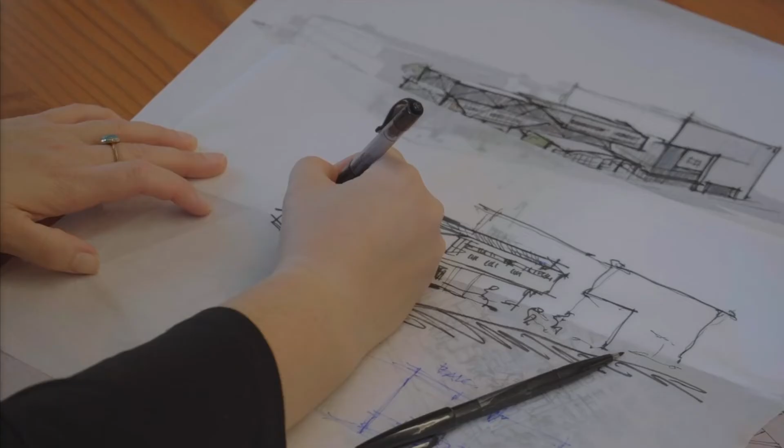I remember in my interview the pride in Barbara Flammang's voice when she told me the firm was more than 50% women. And it's not an intention, but it's just looking at the person and the talent. We don't feel like we're the exception in the architecture industry. We feel like we belong at the table just as anybody else would. I walked around and I saw women in leadership roles. I felt like I knew this was where I wanted to be. There are so many women in the positions of leadership, from partner to senior associates to project directors, and that really shows staff of all levels that you can be anything that you want to be at KFA or in this industry.

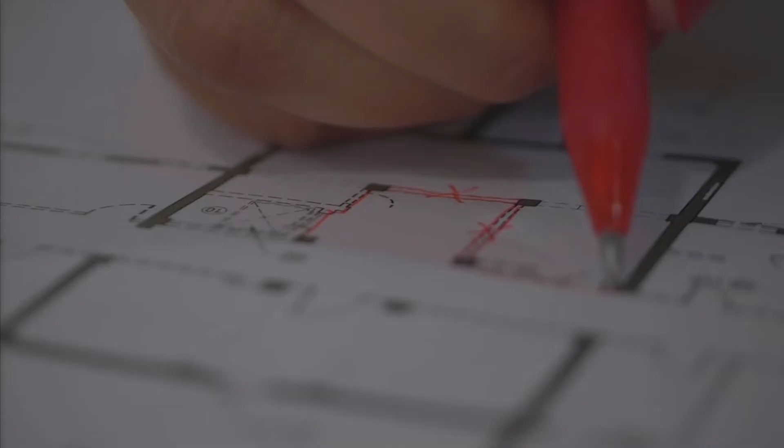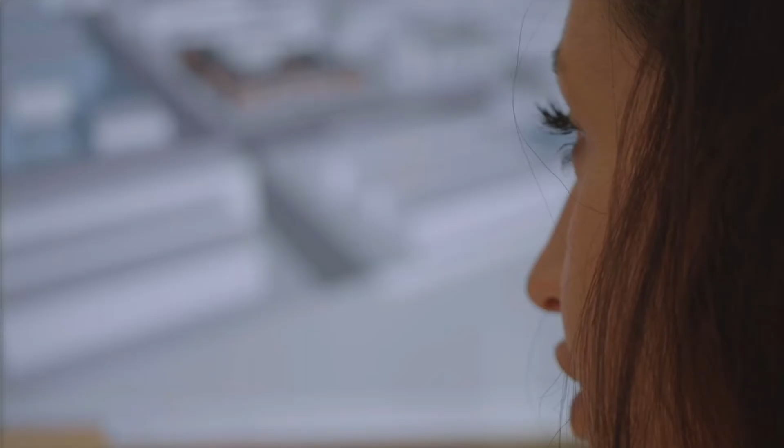I think we need to support each other and be a mentor to other people, to other women in the profession, and share your story. You can reach out to any woman in leadership any day, every day, and ask all the hard questions, the easy questions. That's powerful. My daughter, who's almost 4, says my job is to build castles. And then a personal big one for me is their support of motherhood, just ensuring that I have a strong work and home life balance. We all stand on the shoulders of those who have come before us. And it is important for us to recognize the opportunities that we've been given by other women in architecture.

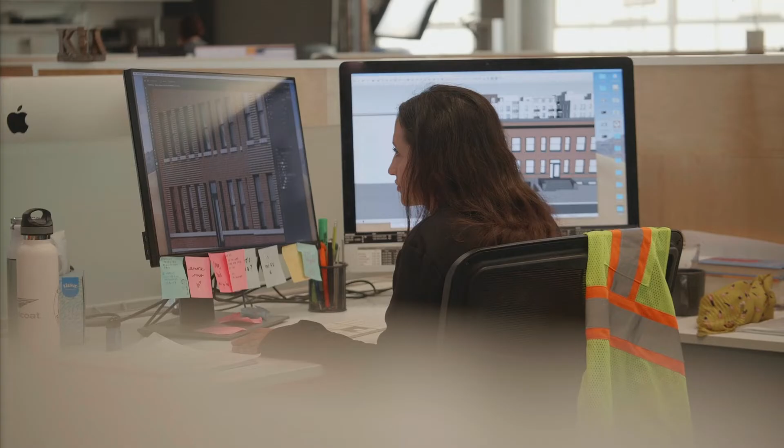It's their legacy for us to be able to bring that forward. Conferences like Powerful show us our community. We see how far we have come and how much farther we can go together. Powerful is an opportunity to stretch for my sisters. Powerful is having confidence not only in my profession, but in myself. Powerful is an emphasis on collaboration. What opportunities are there at KFA for women? The sky is the limit. We are united voices, part of lifting that community up and forward, and being amongst this amazing community. That's powerful.

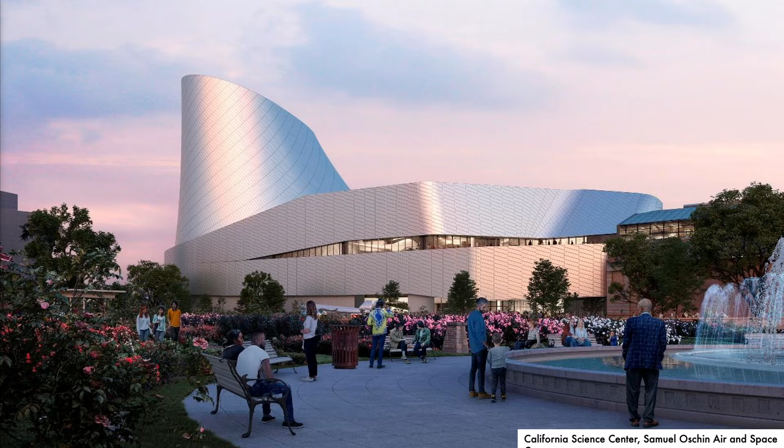This is a women's and children's hospital we're building in San Antonio. One thing that really resonates for me is that this was a community hospital that wanted to become the hospital of choice for everyone. We really took care to find the different ways women want to have birthing experiences and provide that for them. What's unique about all of these projects is that they are all women-led, and I'm very proud that we have great leadership at ZGF in our women.

So I'm going to now change my hat to the president. I wanted to start off by saying...

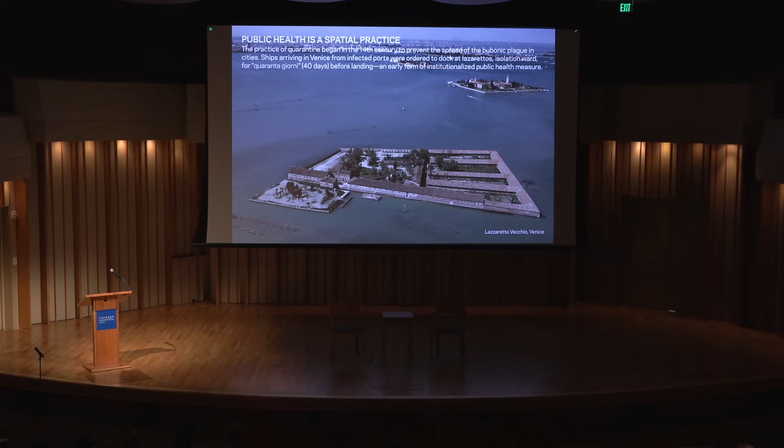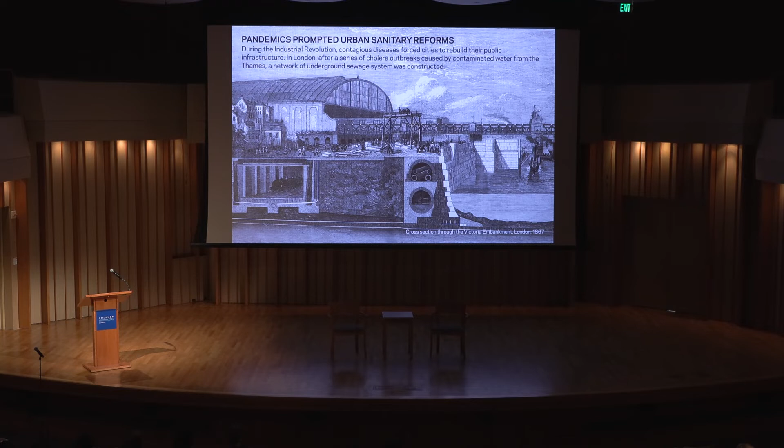And we think about the pandemics prompted urban sanitary reforms. Again, the Industrial Revolution and contagious diseases forced us to rebuild infrastructures. In the case of London, the cholera outbreak led to this whole idea of an underground sewage system. So the spatializing of health and connectivity is one thing.

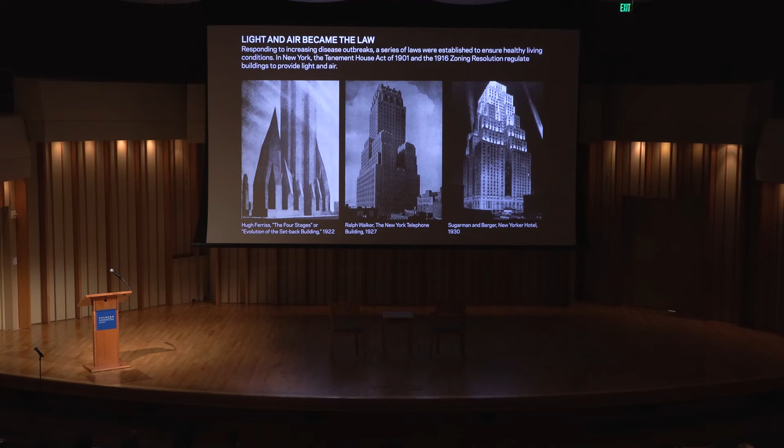But then we think about light and air becoming the law. In New York City, the rezoning at the turn of the century, over 100 years ago, made sure that light, air, and density could be coalesced around the growth of a city. And then the whole idea that we all need room to breathe. As diseases were shaping modern architecture, Aalto's Paimio Sanatorium was a very good example of privileging the whole idea of outdoor space, even if it was in fact elevated.

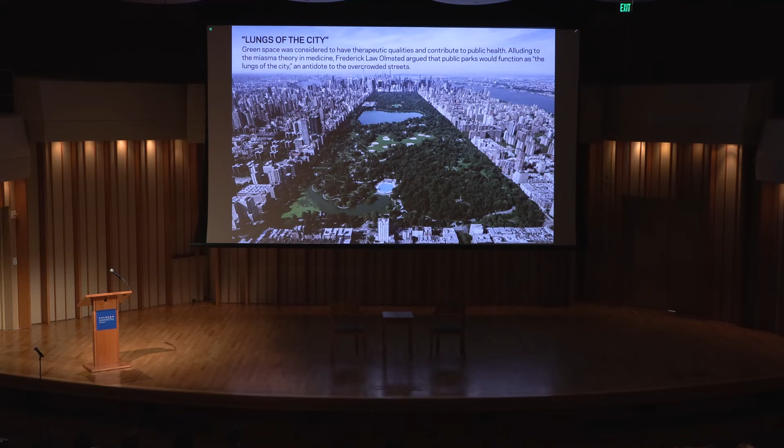This whole idea of masterpieces, and Laurie Olin's piece that was just in the Wall Street Journal yesterday really spoke about the art form that Central Park truly is. It was identified as a place of public health, the lungs of the city. As we think about that lungs of the city idea, this question of breathing room takes stake not only in the immediate sense of an individual needing breathing room, but a whole city and community benefiting from structured breathing room.

What becomes interesting here is this whole idea of anomalies in all of this, and it's the anomalies that seem to somehow catalyze advocates. I'm going to share 6 or 7 projects today in terms of this question about anomalies, advocates, and allies. In this case, the absence of a site for recognition catalyzed innovation for the Women's Memorial Education Center, which was our first project. Michael and I won it as a competition.

The interesting question was, in a forgotten site, there was a forgotten subject of over 2 million women who served as patriots in the country, but had no recognition, not to mention no benefits compared to the men who had served. We had a client, General Vaught, who found this site that was a gateway to Arlington Cemetery that had been designed just as a retaining wall. It had no meaning. She said, can we acknowledge and celebrate the women who'd served since the Revolutionary War and create a place for them?

We promised to fix this wall up. It's kind of a mess. If you ever met General Vaught, you'd realize if anybody came up to you and said something's a mess and needs to be rectified, she was the one that would make it happen.

Congress, within 4 months, actually gave her this site to host as a place for competition. We used it as a site to say, when we won the competition, that wall had been a barrier, simply a retaining wall. Women had faced barriers, and we could actually come through the barriers, enabling her advocacy for the women who had no voice and no legibility, creating a place, a commemorative gallery.

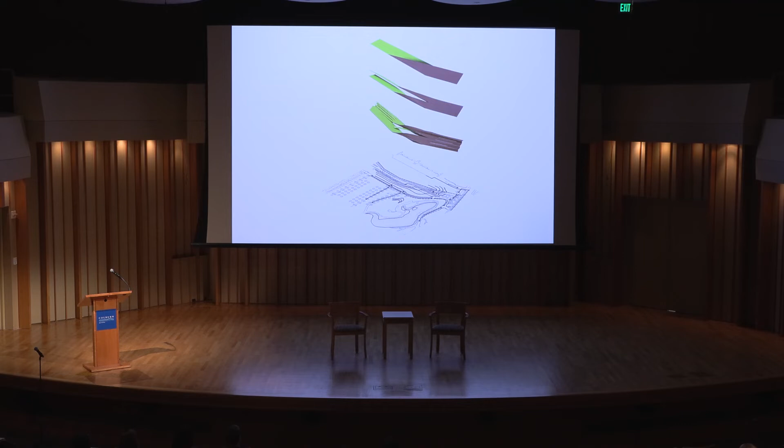But see that kind of continuum as something that is 100% natural. Just as Olmsted had an imprint on the city with Central Park, he certainly had an imprint on the development of the paths here at the 52-acre Brooklyn Botanic Garden.

In this case, we wanted to honor those paths to keep clear of the drip line of this cherry tree and enable that kind of continuum of pathways, while also enabling an enhanced width path here to be a room that could actually seat about 250, a two-sided room, in fact.

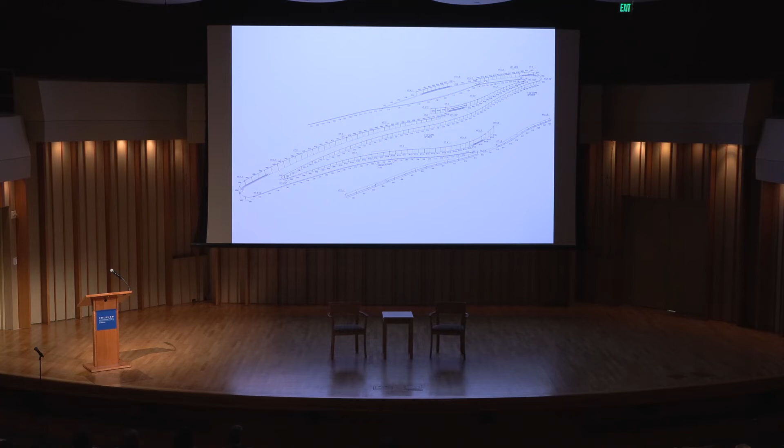If you will, about a 1,000-foot walkway that with over 600 individual precast panels could actually form the basis or structure for a brand new garden that would, if you see on the upper left where the subway arrival is, make its way down and slalom into the garden.

And within each turn of that slalom, there would be views of either Cherry Esplanade or the Rose Garden, but stabilizing now something that would be an adventure as opposed to simply an accessible route, an adventure into a kind of a new ecology, a new garden, if you will, a new sort of lush garden that over time may very well overtake these walls so that you truly feel as if you are simply slaloming through a new garden.

But more importantly, it's not just those who are in a wheelchair, but those who are with strollers and families—this is really a route that is not so much of an accommodation, but hopefully a celebration of the garden.

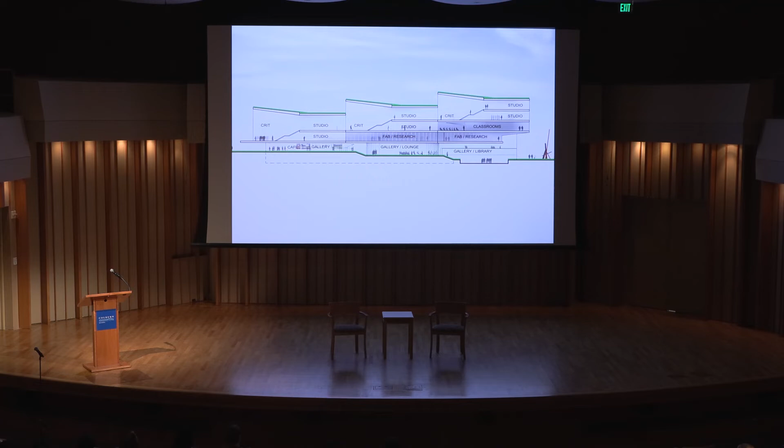This whole idea of a common loft that can be shared and light-filled as a place of collaboration became a model that inspired us to think about how this College of Architecture and Environmental Design, which has architecture, urban design and interiors and a number of other disciplines, could create a new topographic set of connections that would enable the studio spaces, classrooms, gallery, lounge, and cafe to be seen as an ensemble, a new kind of factory.

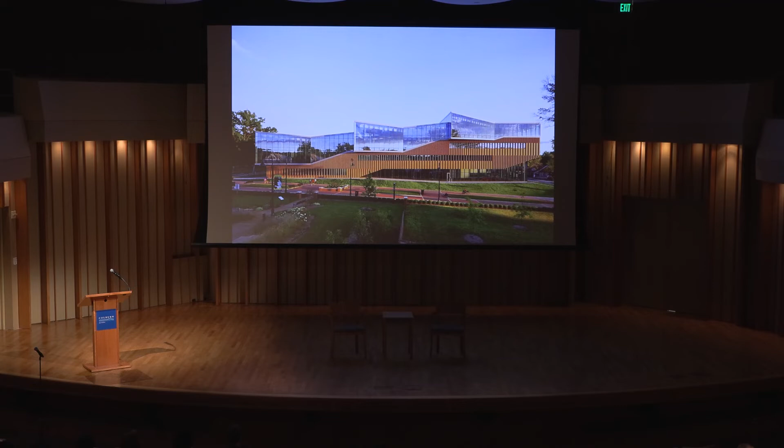That would take full advantage of the elevation of the campus, which is very low. You can see on the left, and the elevation of the city, which is higher, nearly 6 stories on the right. So the building stretches, and off in the distance, toward this new and emerging downtown campus or landscape.

It creates a new Tiffany window for architecture in particular to the core of the campus. Now that kind of itinerary, if you see this here on the ground level, there's a kind of social stair that brings you upstairs and actually protects the cafe, and off in the distance you can see an event space and library.

We were very excited to work with Belden Brick, who had contributed very much to the materials library at the university for the building, to come up with a new custom brick that would leverage the fact that a nearly abandoned kiln here, the Beehive kiln, that could never promise you regular color, could actually produce one more thing—an extruded brick that would take that iron spot and take it out just to the edges of capacity before it needed to be reinforced by steel, to add a new tactile engagement with that building facade as it descended and reached the ground at the campus side.

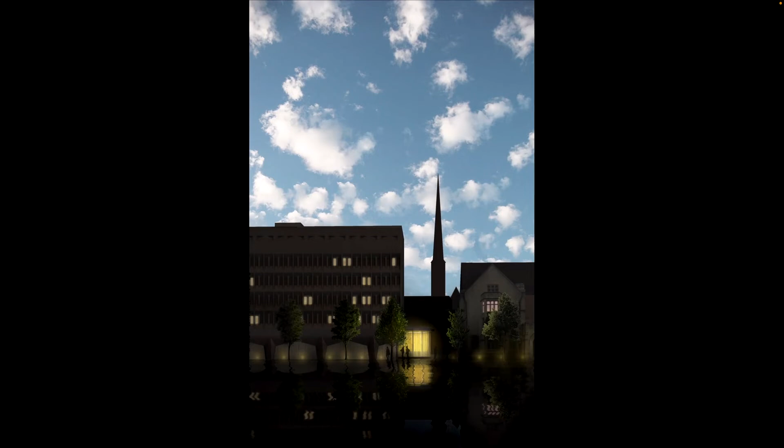So the query was, how on earth could you create legibility for an aspiration in a very small structure for collaboration and an invitation for collaboration to take place? So we did this kind of Magritte view, where at night maybe it comes alive.

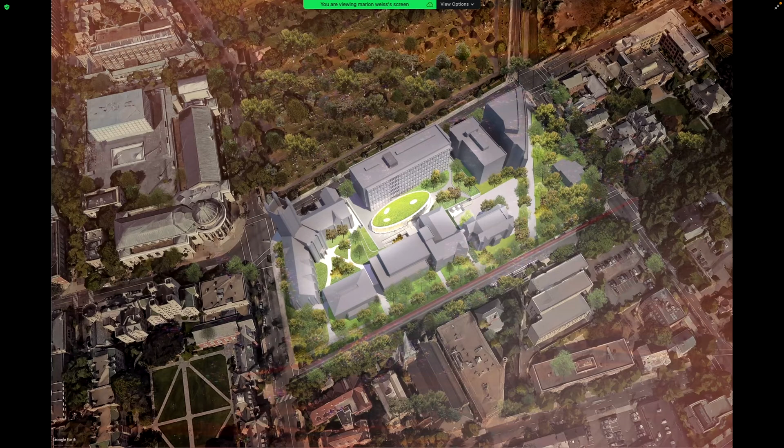And this leftover space that truly was really just the backside of all these lab buildings, and in fact the roof deck of one of the lab levels, could be transformed into a new garden, and a new garden with a tempietto of sorts of transparency or collaboration. And so the aerial view here shows this idea that creating a new landscape in a place that had been paved and lost in a backside could in fact create a network for all the engineering buildings to come together.

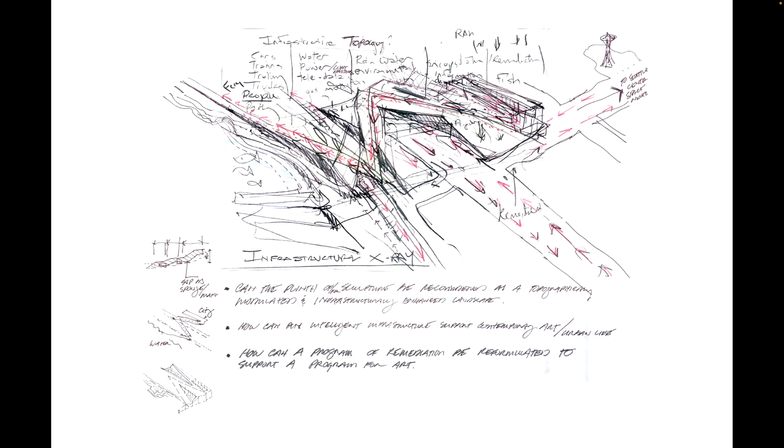The design here, which is really an earthwork, had to simultaneously address a thousand contradictory forces, from environmental to urban to infrastructure to art. Our query was, if we think about these all together, we can imagine a 200,000 cubic yard earthwork that creates multiple environments and a journey slowed down, wandering from the city to the water's edge.

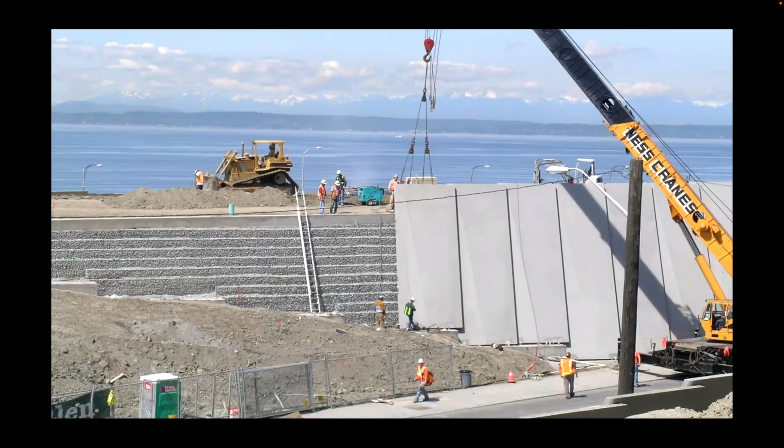We worked with incredible engineers, MKA in Seattle, who introduced us to highway building techniques because it was the most cost effective. You can see, even with these overlapping concrete planes to hide the mechanically stabilized earth walls, that we could be seismically resilient through that overlapping.

What was fantastic about all the donors was that as the name Olympic Sculpture Park came into focus, it was never named for one individual, but for a larger horizon.

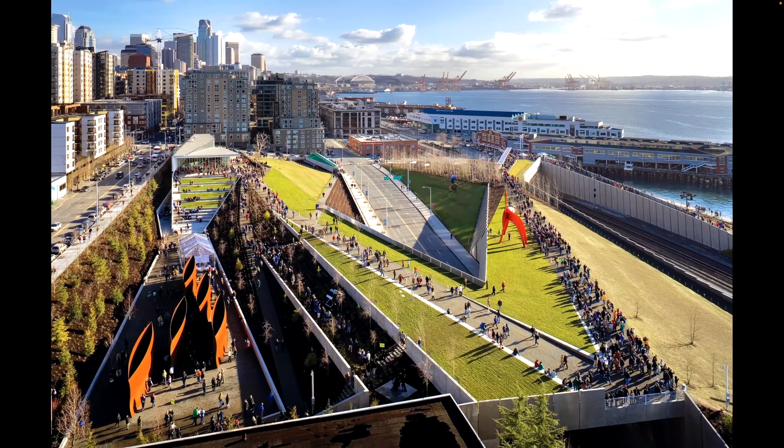The idea was that everybody could come together and discover the park, discover art, and discover a community that now had a place to wander from the city to the water's edge. In our original thinking, topography could become our friend here.

In this case, a valley could forge a new location for Richard Serra's work, Wake. But it could also be something altogether different — an amphitheater for a jazz concert — as it leans towards the pavilion, really a Kunsthalle for art, with Pedro Reyes's incredible mural and Capulas suspended, and also Roxy Paine's stainless tree.

You can see that the building itself is just conceived as an unfolding topography in and of itself, almost a reification in small form of what really is at stake with this unfolding landform of a landscape.

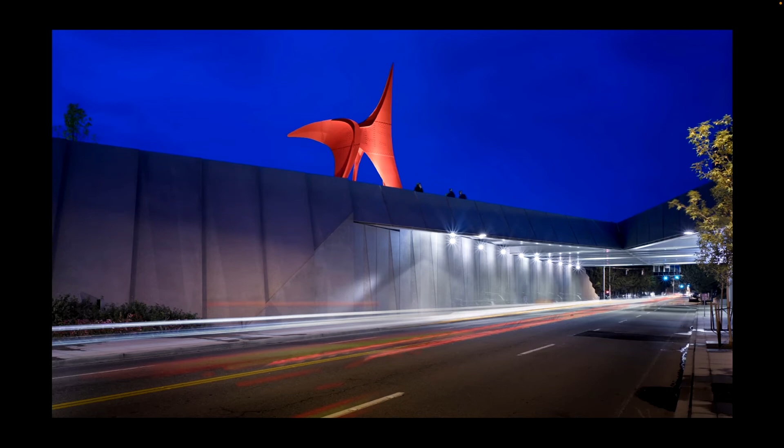And again, as we think about infrastructure, the whole idea of the highway crossing could be brought into clear focus so that the dead center of the highway, one could actually really see that point amplified on the pedestrian crossing above. But certainly anybody coming through the highway would be mindful that there is something other than a typical crossing above, with the point extracted below.

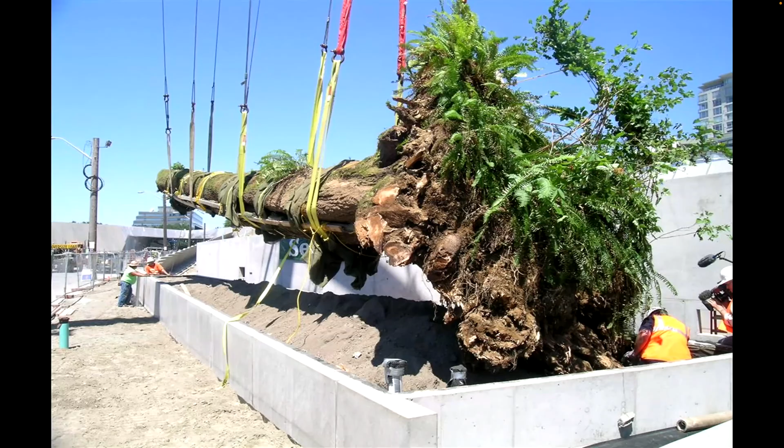And the whole idea of new natures there with Mark Dion's piece on the lower left, a fallen log in the forest brought to the city edge. And we actually designed this enclosure so that this nurse log could actually have a home.

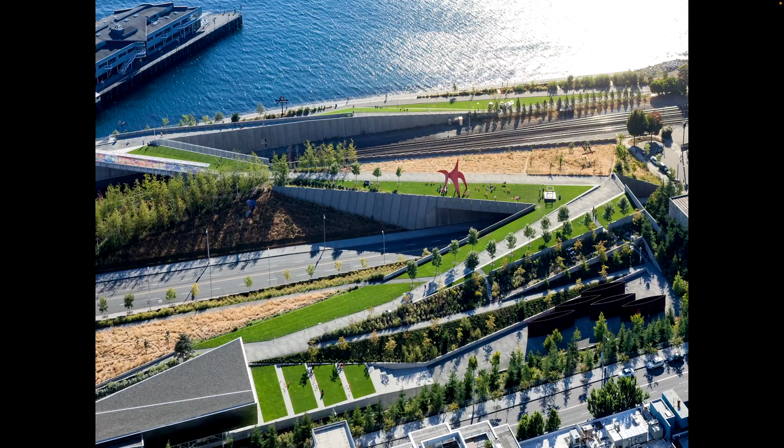And then as we look at this incredible view by Iwan Baan of the simultaneity of the infrastructure of the city and this kind of earthwork crossing, it's a whole idea of infinite worlds being compressed, even crossing here at train tracks. Teresita Fernandez's beautiful work, Seattle Cloud Cover, here on this bridge, but also a place where train spotters who may have no interest in art could actually watch the trains that are heading through and heading up to Canada.

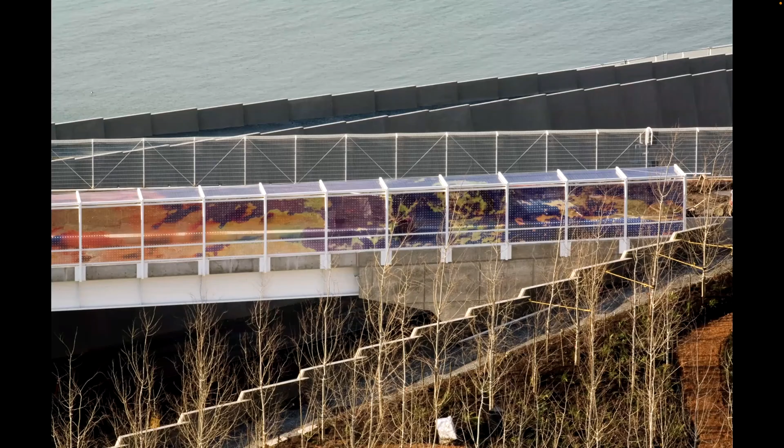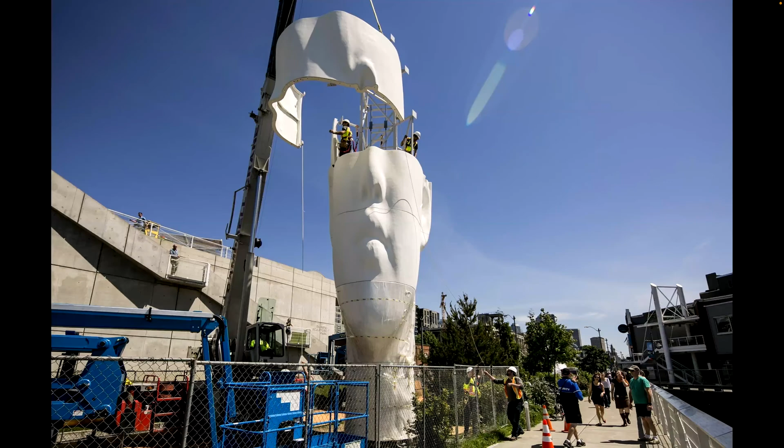Again, though, this question of art coming together and being, in this case now, the walls being the recipients of light and chroma, and the aspen trees beyond, that again, we can start to see that even the rebuilding of the water's edge, which was a very tight site, became a place where it currently even is welcoming new pieces. And here you can see Jaume Plensa's work being installed at the base.

But for us, one of our proudest moments here was just being an advocate with the museum for a larger environmental quest. And in this case, we pulled back the seawall to create a new beach. There's nothing natural about this, but what is fully natural is all the logs that have made their way in here. But it's really in service of salmon habitat.

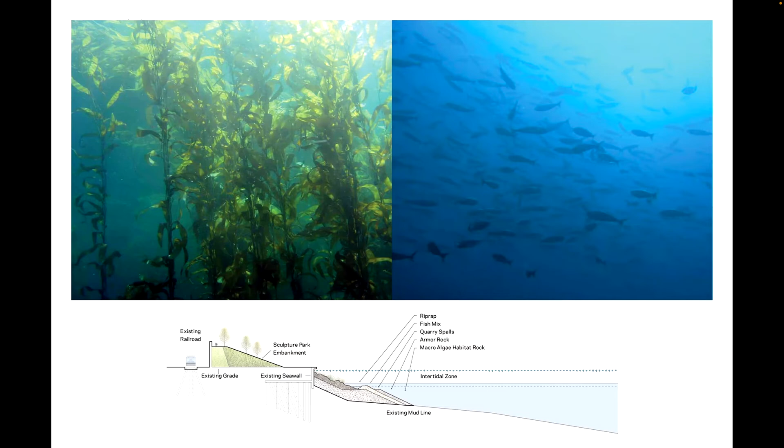And you can start to see here that this has been working with the University of Washington, and it continues to be supporting the seawall, which would have been failing, but also creating a new community for salmon habitat. And as it continues to be monitored, it has restored the ecosystem at the water's edge and has now been the new model for the rest of the waterfront development that Field Operations is doing to stabilize the seawall and create habitat.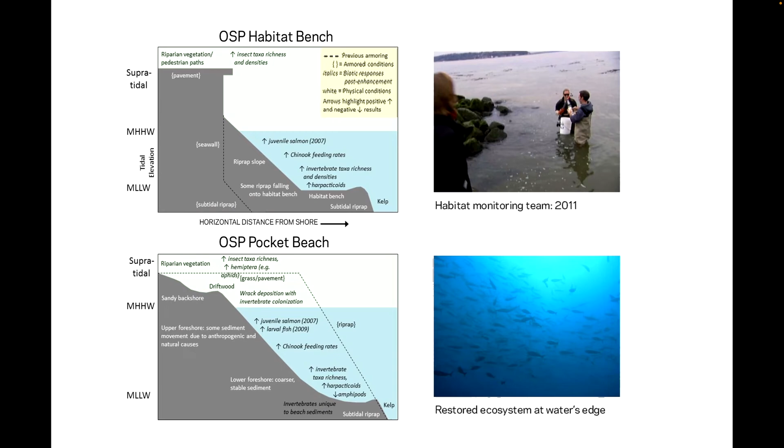And yet the question is, well, where does power reside? It's never singular in these large complex projects. And as you can start to see here, a thousand hiccups, checkpoints, advocates, and if you will, antagonists embedded within the process come together to enable the realization of something as transformative as taking a seawall here in a parking lot and turning it into something that can actually join the constellation of public destinations in Seattle.

And we love this view here because we know there are landmarks such as the Needle off in the distance that people can understand and see, and others that, as we look at the continuum of the water's edge, which have been absent from public realm, which are now becoming increasingly central.

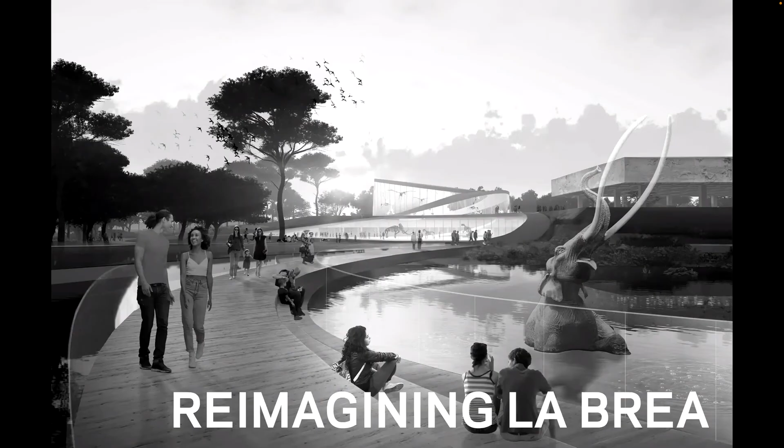And so again, if we think about these anomalies, advocates, and allies, these improbable simultaneities, science needs room to breathe too. And we're really lucky to be in your beautiful city developing the evolution now of La Brea Tar Pits.

And in this case, what's so remarkable about the La Brea Tar Pits is that it is truly a site that's in formation and that has really defined so much of Los Angeles as we know it. Pleistocene being in full form thousands of years ago.

And yet it's been the defining nature of what Los Angeles is, really a city that's been in a hurry to redefine its future. And yet it has this incredible past that you could say maybe in the spectacle here of this urban fiction here in the lake pit off of Wilshire Boulevard with the Page Museum beyond, that in a sense, touching the surface of something is one thing, but it's another to truly excavate through science and unearth these amazing mammoths, mastodons, and dire wolves and saber-toothed cats.

And yet what's amazing about the Natural History Museum in Los Angeles is that everything in that museum has come from this site, but so much of it is now hidden in storage as it gets prepared and used by the scientists. So the query is, if we think that science and art need room to breathe, what happens when they are hidden by a berm here?

We've got over 360 days a year of active excavation, but also nearly the same for the public coming to discover something here. So we started to think about what might be interesting is to think about the history of La Brea tar pits and the history of Los Angeles as something interwoven, truly as we also think about it as a public park.

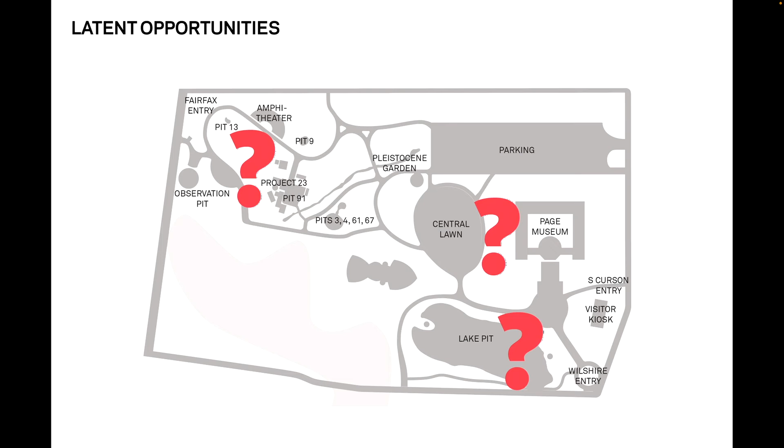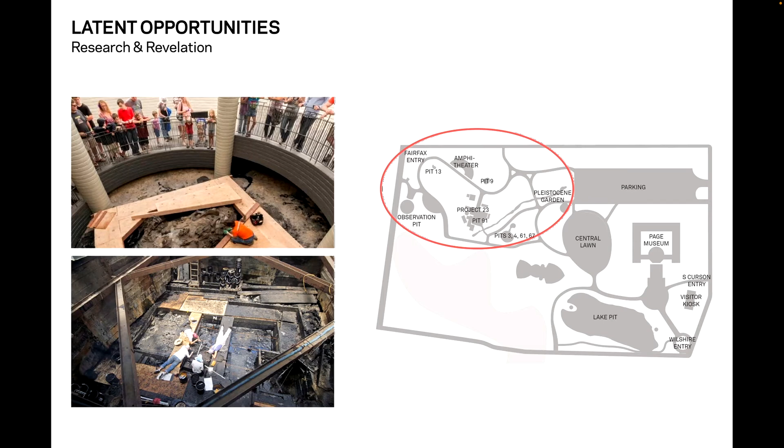You can see the museum, the LACMA Museum, and even further beyond the Academy Museum, such a constellation of things happening simultaneously. We said, could we look at the latent opportunities of where excavation and research are actively taking place in one part of the park? A central area where community and culture come together with kids rolling down the hill on the berm, but also coming into the Page Museum.

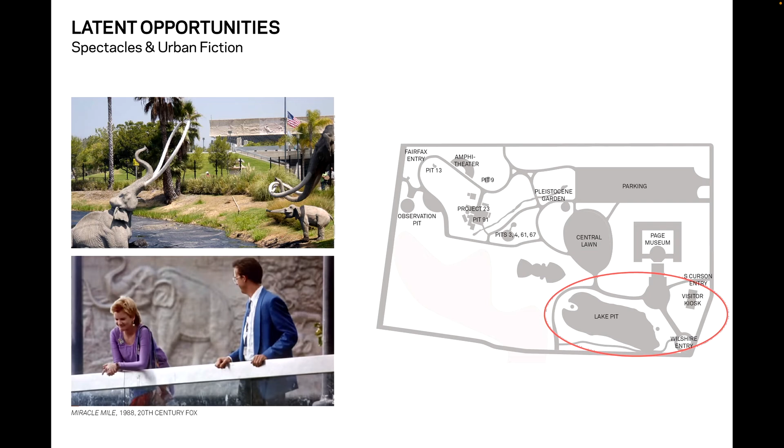And also, if we think of this as a kind of spectacle and urban fiction with the mammoths and mastodons, if you will, at the Lake Pit, and all the movies that have seen this very same image, what if we could think about these things all together, as continuums rather than separate?

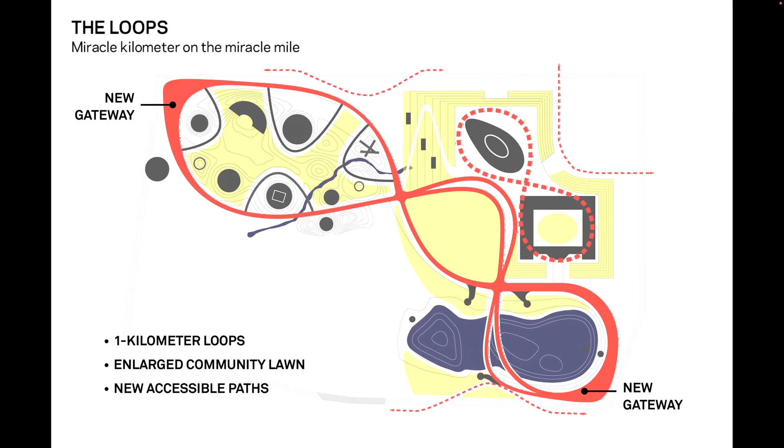And so that led to the whole idea of a 1 kilometer loop that would enable you to come in anywhere, but actually discover through these accessible paths the Pleistocene, the Anthropocene, and the Holocene as a continuum, as opposed to something that's divided.

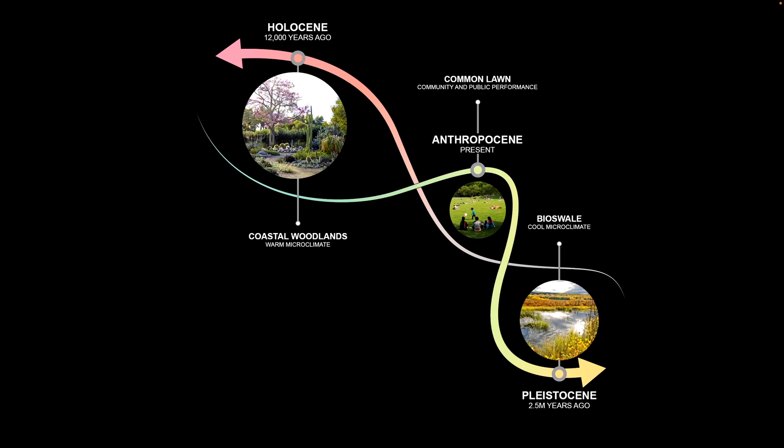You can see here, our competition vision really was trying to make sense of something that in some ways seemed contradictory, but seeing them as continuums that would welcome people with shade—and we know shade equity is a huge issue, in particular in Los Angeles—with the tapestry of all the debris that actually tricked animals to fall into the tar, being reintroduced here as a canopy.

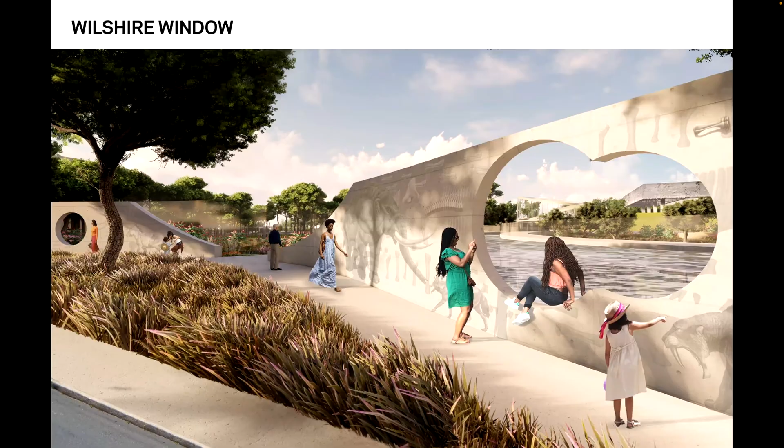But also taking things that have been just simply barriers, perimeter fence, and rethinking them as portals, almost like a construction fence, as places of discovery. Science and museum and excavation and community—all of these could be seen together as not antithetical.

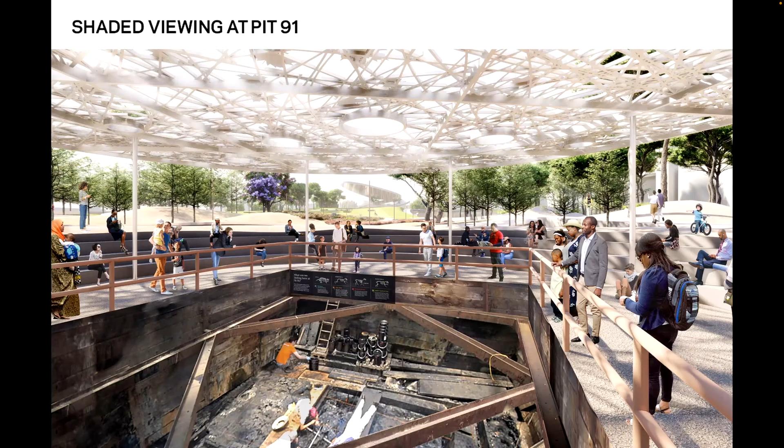And here the case of research and observers sharing the same canopy. And even the expansion of the existing museum, enabling the existing museum to thrive, while the expansion could also then add new opportunities for exhibition, research, and laboratories.

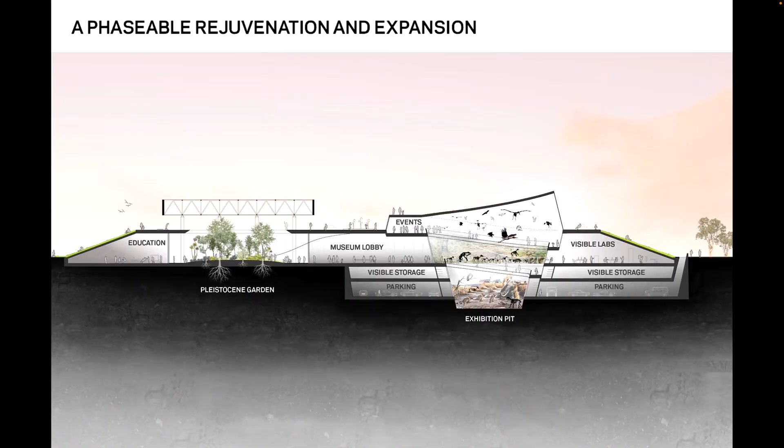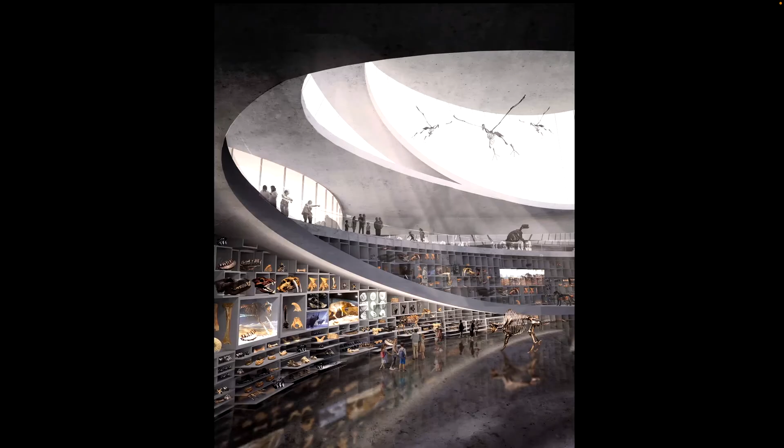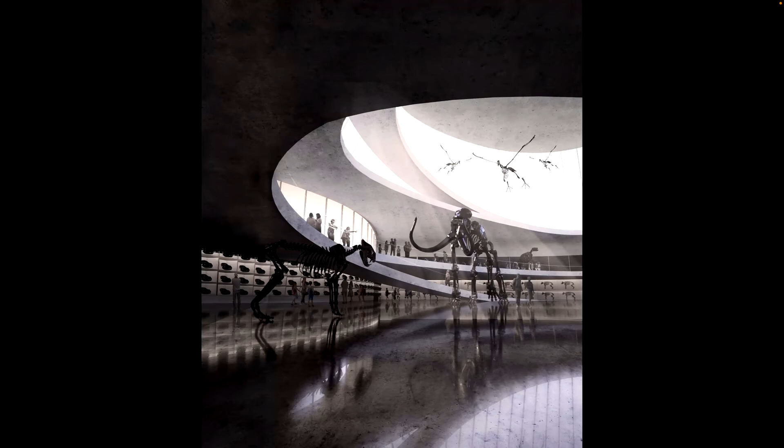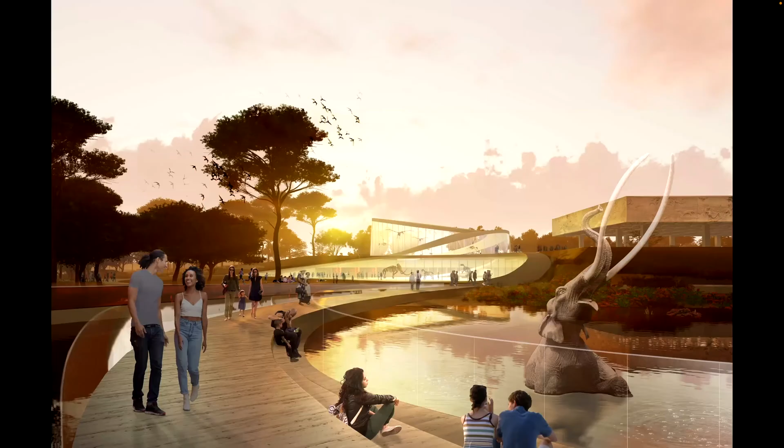And yet that idea of simultaneously being able to see all of this together is something that we can see right now through the lens carved through this kind of berm. It's that simultaneity of the magic of Los Angeles, that maybe at night you could sit on a blanket out on the new Central Green and see a film that tells you a story of the Pleistocene that's no longer there, but still with us because of the pure preservation that the tar had provided for all these specimens.

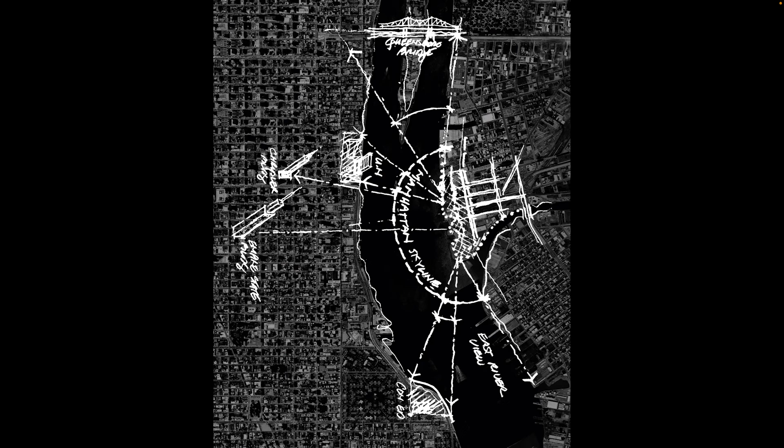Now, finally, this last project, Anomalies, Advocates, and Allies, relates to contamination, flooding, and a public realm with a commitment for more room to breathe. Hunters Point South Waterfront Park, in many ways a leftover abandoned industrial site, had fantastic views back to Manhattan, but also belied a legacy that was at one time wetlands, later industry.

And with Hurricane Sandy, nearly underwater. So the question was, could we design a park that could somehow make sense of this strange edge, so that it could create value in advance of developers doing the largest affordable housing development in New York City since the 70s?

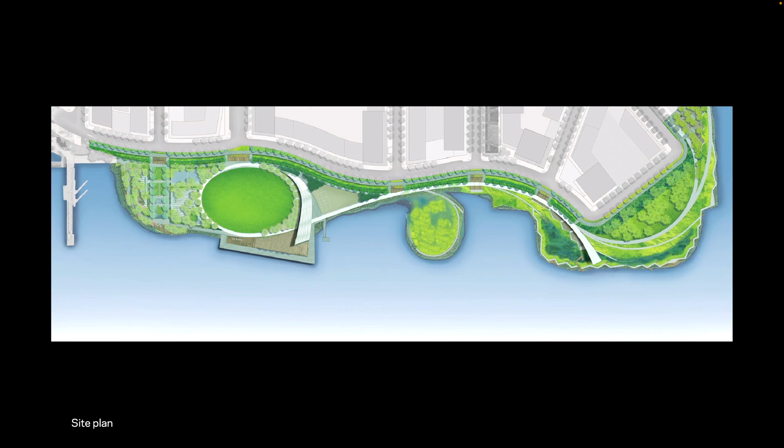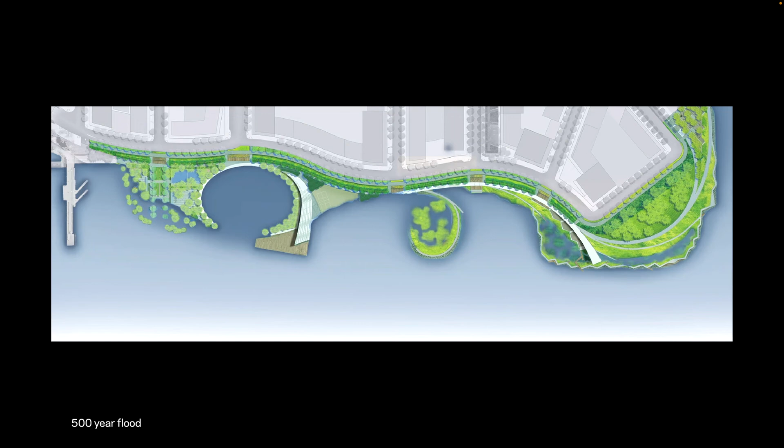And so we said that waterfront could actually do many things, but most importantly, it needed to be able to absorb the floodwaters and thrive as opposed to be destroyed during any kind of event. So you can start to see here the park as it unfolds, opening its way for an urban plan, in this case working with Arup and SWA/Balsley, simultaneously weaving together a larger landscape of infrastructure and public use.

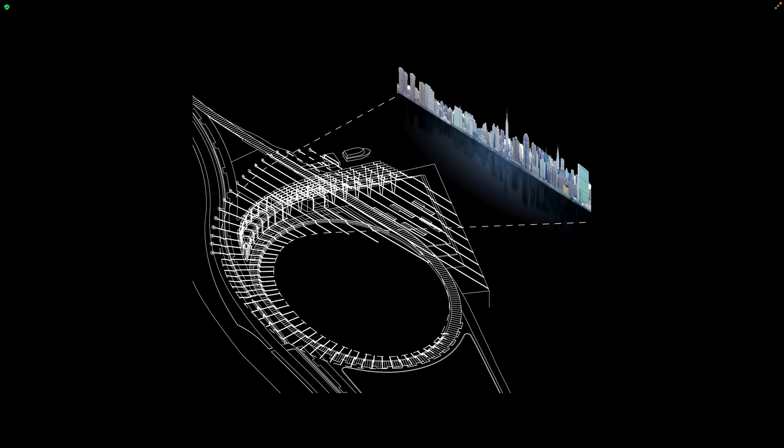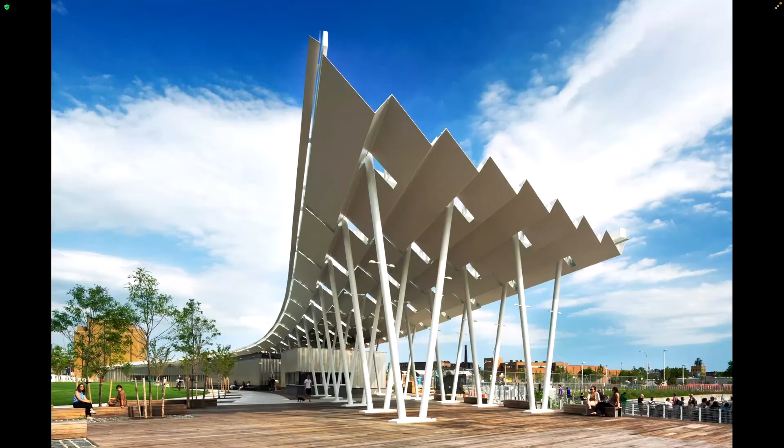Here's the amazing thing: when you're on the water's edge, the ability to co-opt an expanded view, in this case of Manhattan, became something where we could take into focus the activity across from the schoolyard and create a playing field, but we could also create a new prospect of shade and shelter, because this is where the ferry needed shade and shelter.

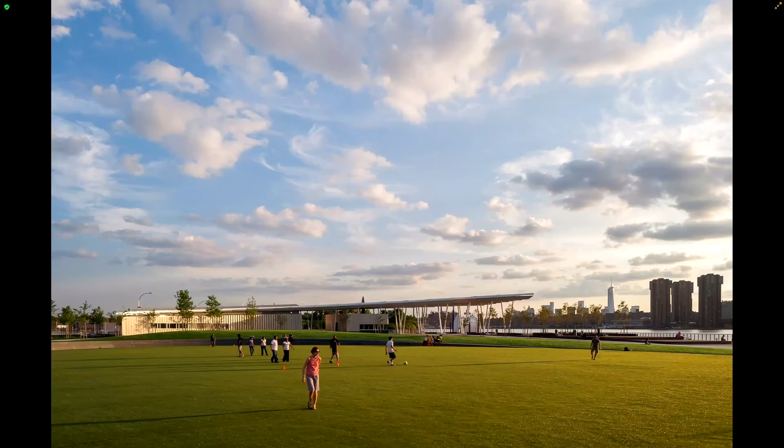In this case we could also create energy from solar panels on it, and also collect water to irrigate the park. So again, many structures are coalesced here, including concession, a maintenance building, and restrooms, but mostly framing a collection of environments—in this case, Water Taxi Beach now made a little family friendly, or the kind of sheltering area for concession with views of the city beyond.

And then enabling something as extraordinary as this particular view of Manhattan to be brought into focus and into shelter at night. Now, the interesting thing was this project had to happen five years apart, phase one and phase two, just because funding streams were variable.

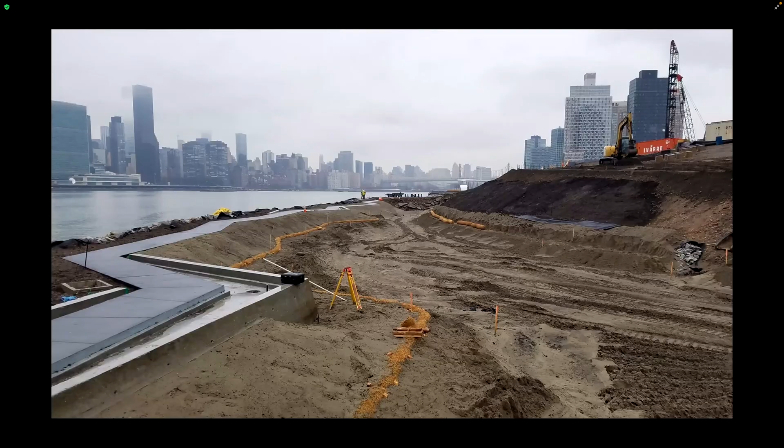Keeping our courage there and realizing we had to interview once again for a project we'd already designed was certainly breathtaking. But we were very excited about this false topography created through the excavation of the Midtown Tunnel, becoming an opportunity now to carve this topography to create a new stable habitat for wetlands.

So you can see this kind of fortified walkway there to protect the wetlands, and that new wetlands becoming a resource for habitat that could actually take the tidal flow, which is six feet twice a day, fully elevated and then down. In the distance, though, what you can start to see is that this sense of being able to walk on water on that fortification, particularly at high tide, is pretty unusual.

In fact, most of the time we're at a really arm's length from the water's edge. And elements that were just peninsulas could now become islands as we excavated behind them to make a place of retreat that would be independent from the rest of the park, but still a kind of unique place to enjoy the prospect of the river and the city.

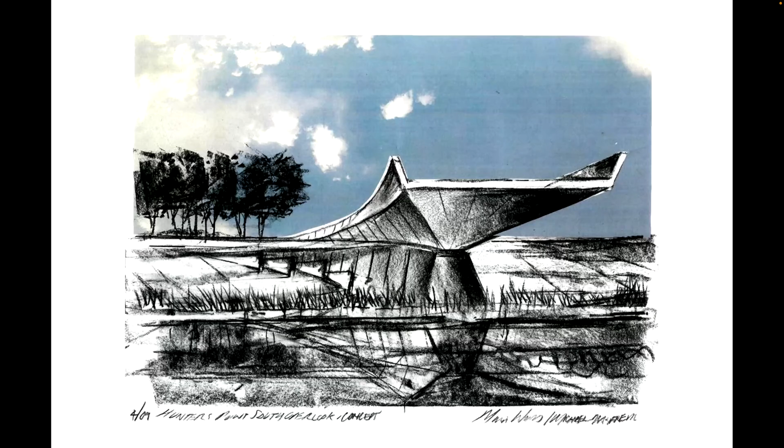But for us, what became most interesting in this question of breathing room really gets to the horizon beyond. We were very interested in celebrating the topographic distance between the water's edge and the promenade above, to take the idea of shipbuilding a little bit further, so that the whole idea of the prow of the ship could be sheared off these loops of movement.

Literally working with shipbuilders in Maine to create something that might actually be brought down to the level of the park and offer incredible views of that horizon beyond. And you can see it at high tide, where you really do feel like the grand prospect and the intimate views are simultaneous.

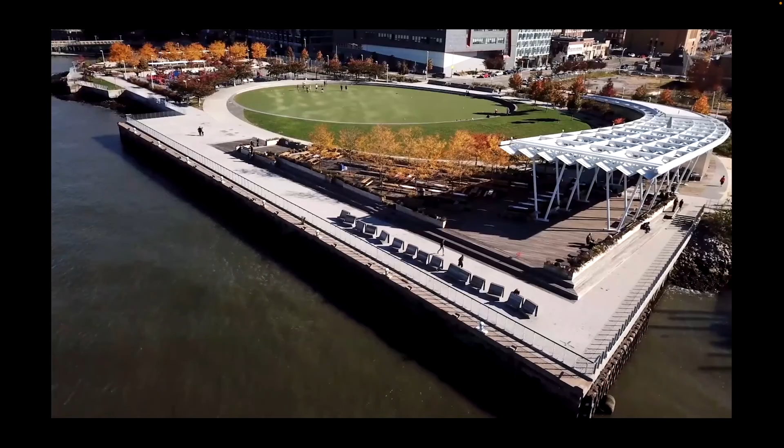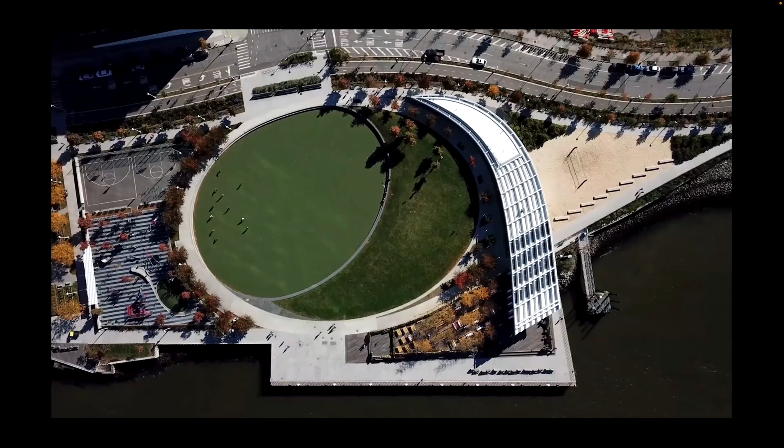And if we start to think about this question of breathing room, for us it seems profoundly important, particularly at this time of social, climate, and environmental challenges, to really build in such a way that we can welcome larger communities and actually work with the constraints of infrastructure and the obligations of nature to create destinations that can be enduring, and have meaning for a larger community than we even know could enjoy it now.

So I will close with that thought, which is that I'm really delighted again to be able to be part of the conversation that you were having over the course of the day, and to be part of the conversation that might continue now.